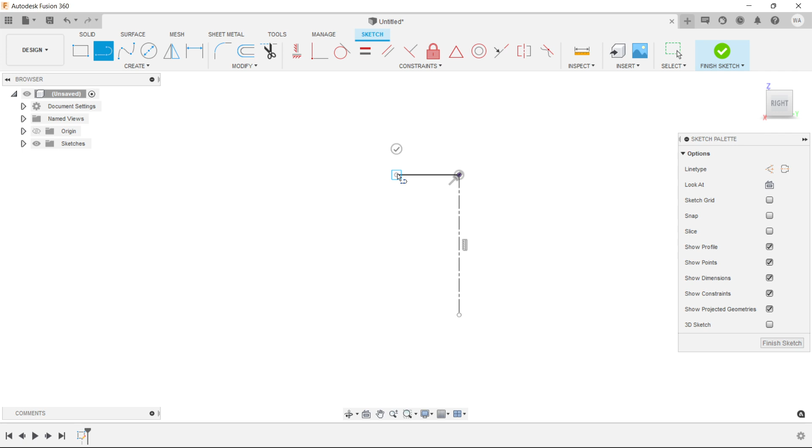Okay, so we're going to make a little part here. Again, I'm just kind of farting around. We're basically making a bolt or a screw, okay, a cap screw. Now, I guess the head is that big, and this is about that big.

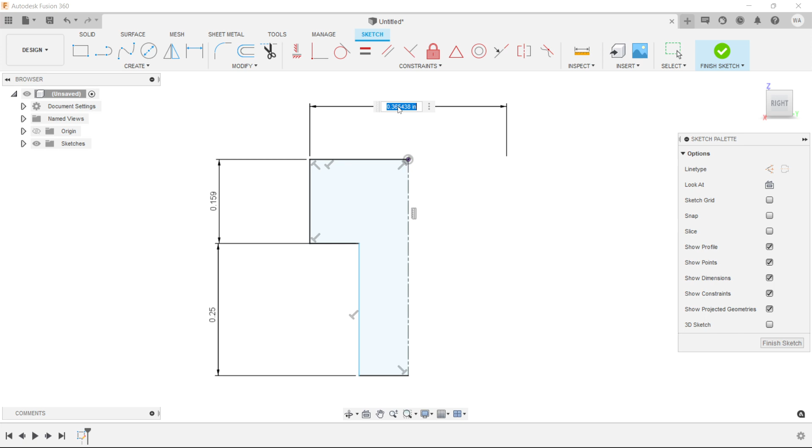Okay, so once you have these done, then we'll go ahead and we'll put in the diameter of these guys, which is 0.266, or 266 thousandths, I believe is how you say that. I am not an engineer. I am not a machinist.

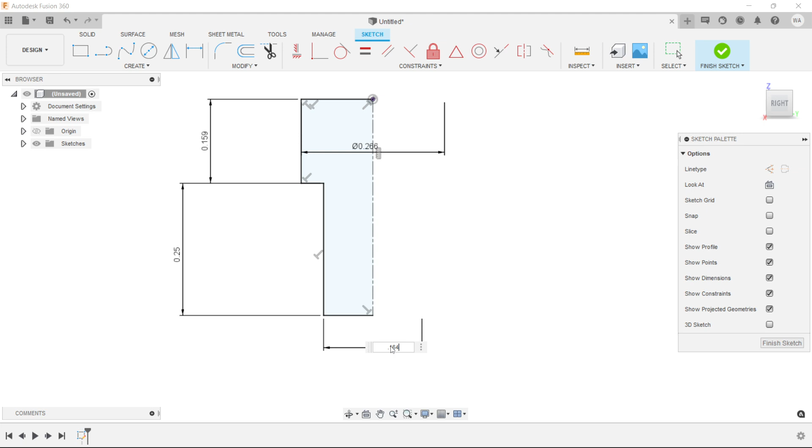So everything I do on here is completely self-taught. I'm just going through the motions, trying to figure out how to do it. From what I can tell, the threads here are, again I don't know how you say this, 8/32. I'm not sure if that's right, or just 8/32s. Not sure, but it's 164 thou, I believe is the nominal, might be the actual - no, I believe it's actually the outer dimension.

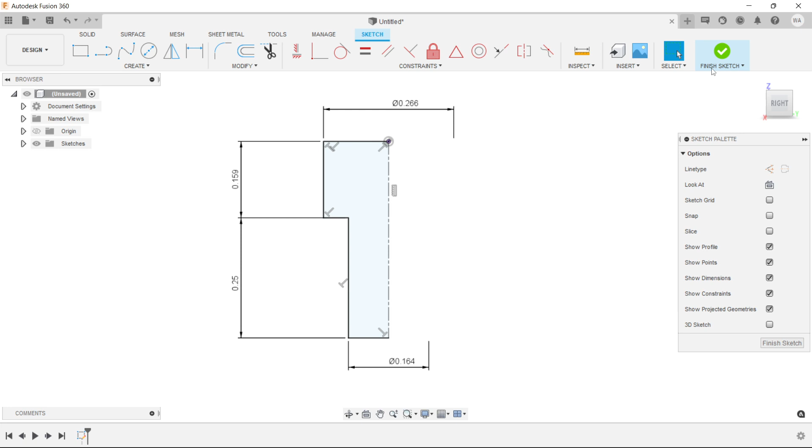So once we have that, essentially we are done with this portion here. Okay, you can make this so pretty if you want, if you're anal retentive like I am. So you have this. Because we've done it with a center line, all you have to do is just hit this revolve button, and bam, you have a screw.

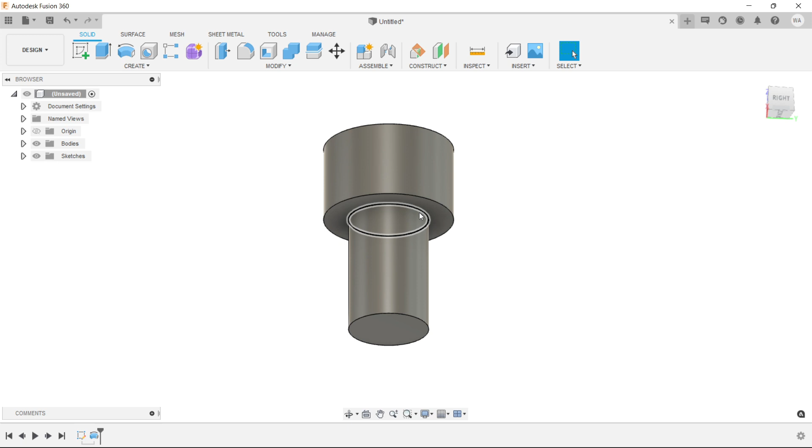Okay, there is no chamfer on the end, and there is no radii that I could see. It looked like it was just all good. However, there is a chamfer on the very top. Exactly how far it is, kind of iffy.

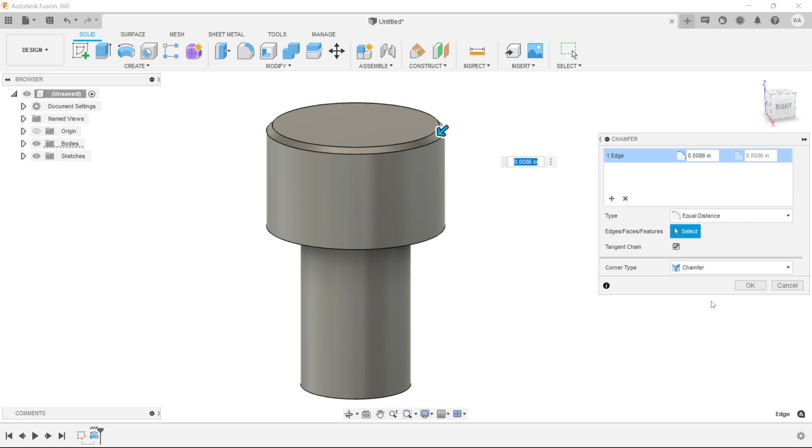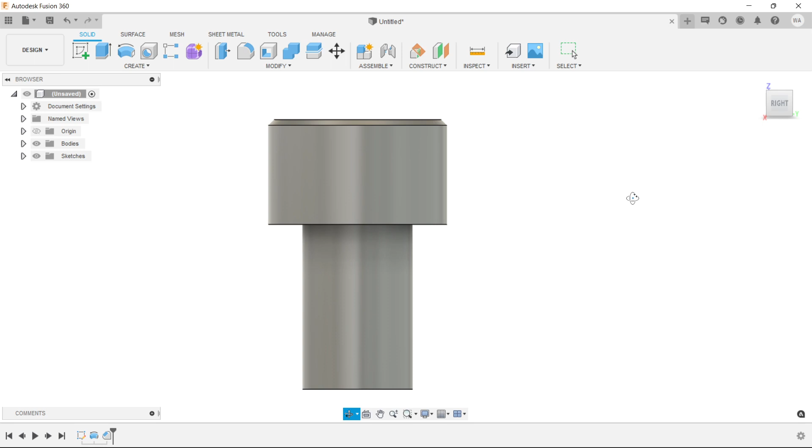Now, once this is done, you can go into create to put in the threads. Obviously, this is the portion we're threading, not the cap. These threads are kind of a silly thing, but here you have your 8-32 UNC. I believe that is like Unified Coarse or something like that. Again, if anybody knows, correct me if I'm wrong, because this is all new to me.

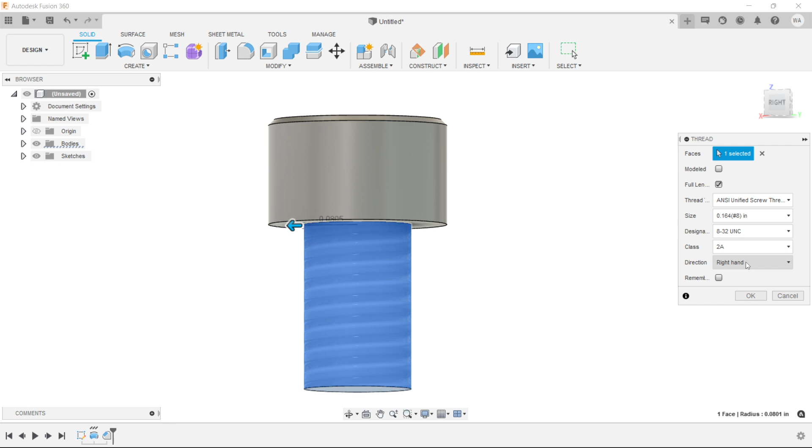For whatever reason, Fusion 360 always defaults to the wrong class, so it is 2A. It is right-handed. I want to see what they look like. And then there's also this, all right? There's full length here, so not all of them - it may not go all the way to the very top.

Okay, from what I can tell, none of them had a distance from here down, all right? Like, most of them went all the way to the very, very top. A couple of them were down in this kind of area here. But they basically have a clearance of 62 thou, if anyone's interested. Okay, I'm just going to leave it as full length. Okay, so there we have that.

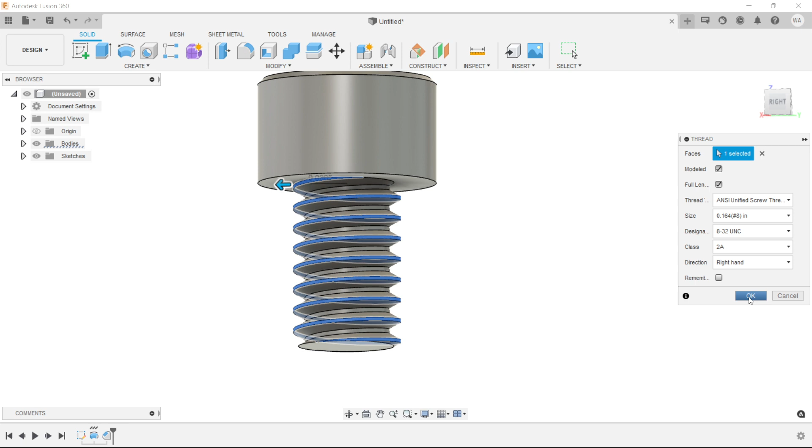All right, and now we get to draw this bad boy in the top here. Okay.

Now, another funny thing about 360 that is just it's an interesting program - I like it because it's cheap, I like it because it does do a lot of really cool things, but there's a lot of things I do not like about it. I do not have any experience with SolidWorks, so one of these days maybe I'll have it.

Okay, so we have circumscribed and inscribed. So as we're going into here, it looks like this is, yeah, this is what I want. It is the outside of the lines here, all right, which is 125 thou, or...

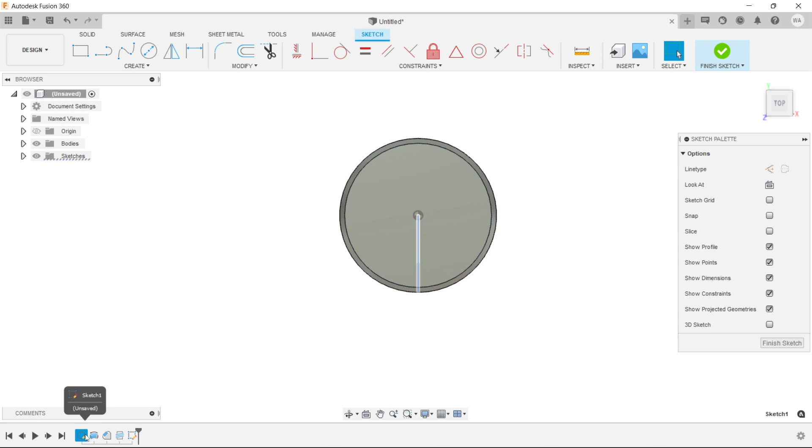Nope, see, that's not right. This is why you mess with this program, because that is clearly not right. So let me see if I've done something funny here. We'll go back in. Nope, this is right. Okay, so maybe I'm just being dumb, you know what I mean, and I'm not hitting something right or whatever. But again, this is for people. Okay, so no, this is the wrong one. Yeah, you want this one.

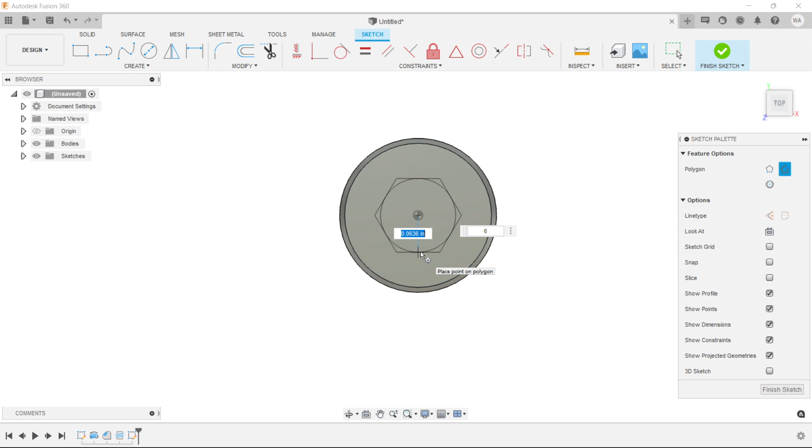0.125. See, that's just not right. It's supposed to be 0.125 from the complete other end to the other end. What if I do this divided by 2? Yeah, that's what it looks like. Yep, that's exactly what it is. Why? I don't know.

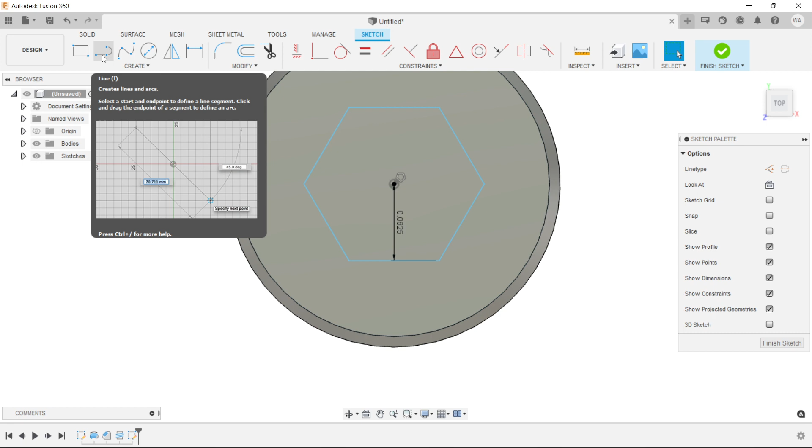Again, if someone can explain that to me, that would be absolutely wonderful, because that does not make any sense to me.

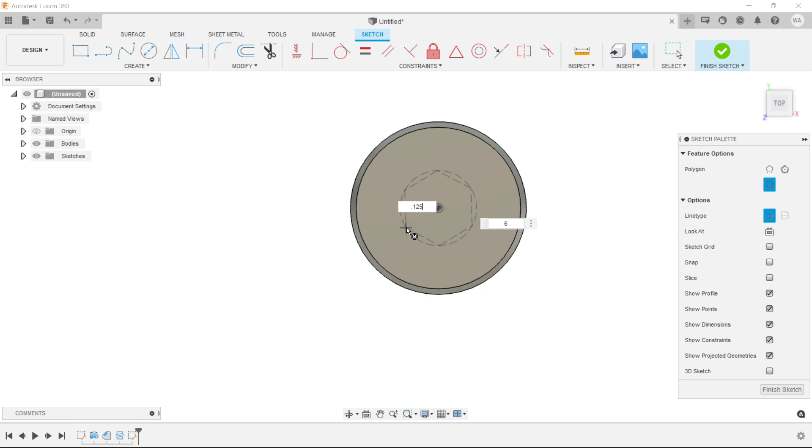Let me see, using the center point and the midpoint of one edge. But see, this is, yeah, this is not right. What if I just try it here, though? Let's try it. Again, way too big.

So if we do it, yeah, see, I don't know. Again, it doesn't make any sense to me. Like, why? There's too many things about this program that just do not make any sense to me.

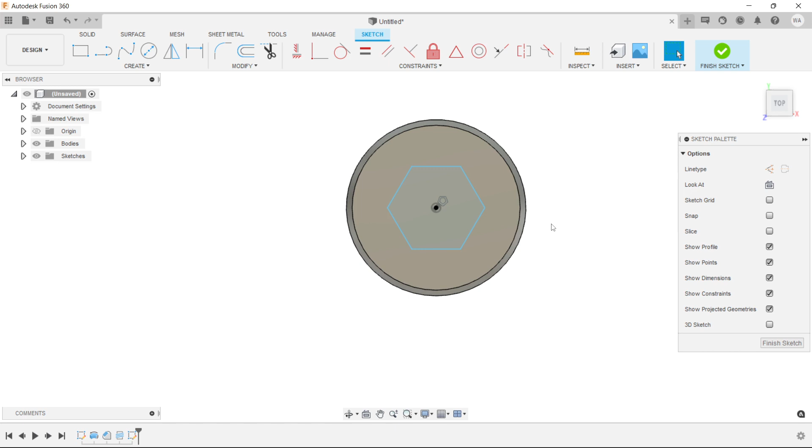Okay, so there we have it. This is our... maybe I can make it constrained if I do this. Nope. So yeah, I don't know.

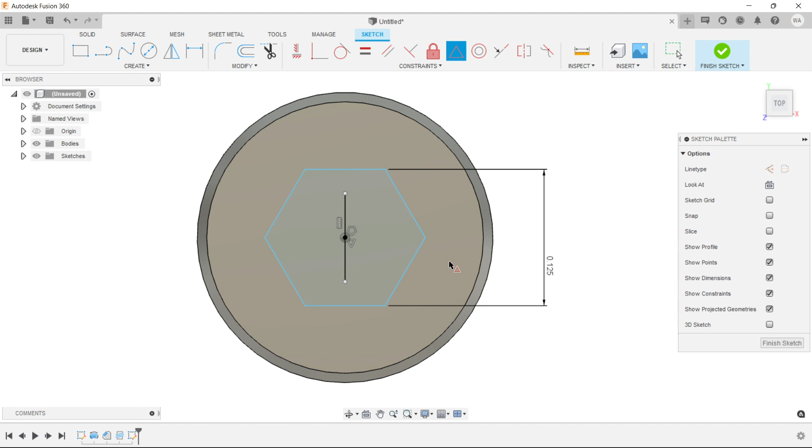Again, if anybody can explain this to me, that would be absolutely wonderful, because this is a program - it's the only one that I have, and it is extremely frustrating.

Oh, okay, it did work. Okay, there we go. So again, we'll put in our arbitrary construction line to make sure everything is constrained. Brilliant. So anyway, there we have it.

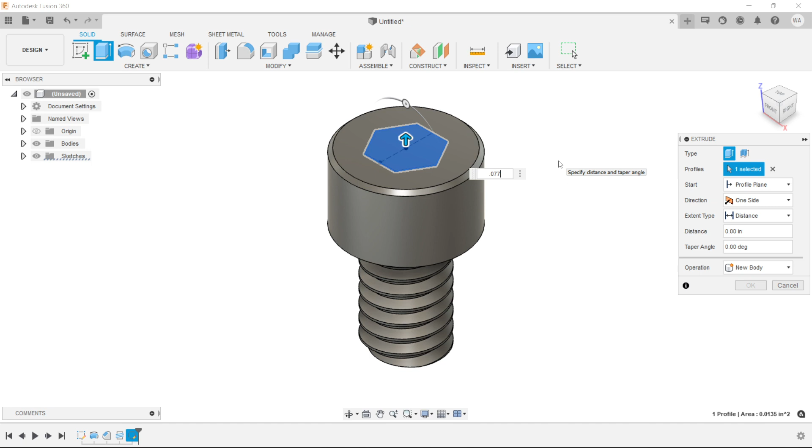Okay, now this goes to a depth of at least 77 thou. Now, how about we do this, but then we keep it - oh no, I always have to type in negative 77 thou. Instead of just being able to change directions or something, maybe someone can explain to me why I can't just put in 0.077, hit enter, and then just drag this guy down. I don't know. Maybe SolidWorks works that way as well.

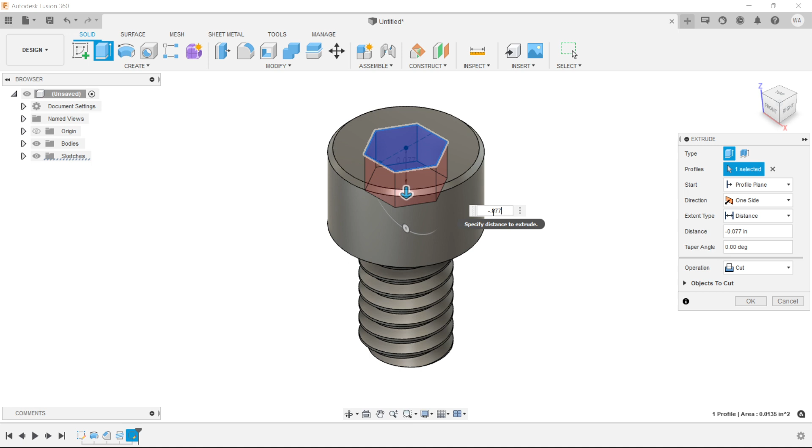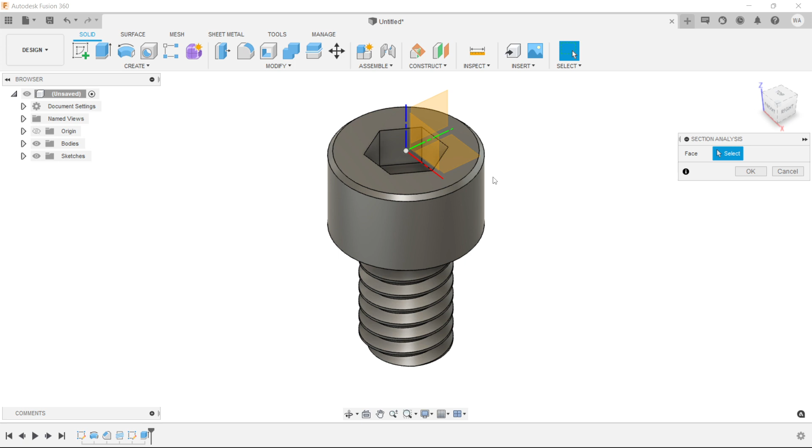I'm not really sure. But anyway, so bam. The thing I don't like about this is that it's flat in the bottom. It's not really flat on the real ones. It actually has an angled bottom to it, because clearly it's stamped into it with a big press, right?

So the real ones actually have a line that comes down like that, if you were to section it in half. Okay, but it's okay for all intents and purposes. This works just fine.

Okay, so there we have our thing. However, it is missing something. It has what is called a 52 pitch straight knurl, and it's to a depth of 0.0137.

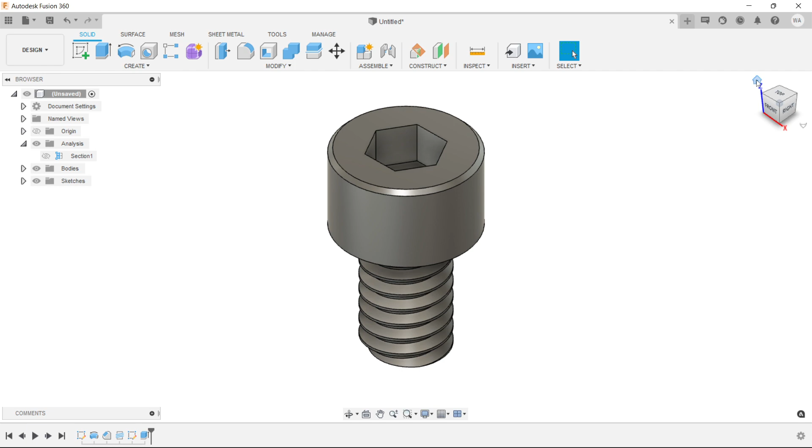No clue what that means. Okay, like I've said before, I am not an engineer, so this is something that I have tried to figure out, and I just physically cannot.

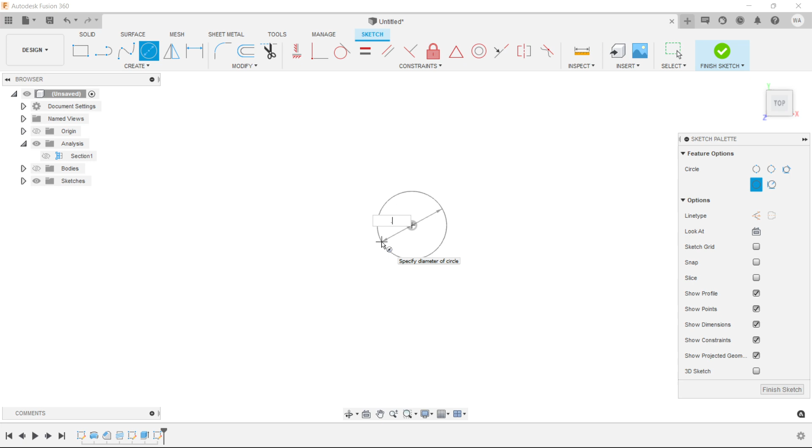Here, this is what I'm trying to do. I'm going to make a circle that is the outside diameter, and then I'm going to do this - I'm going to put the outside diameter. Interesting.

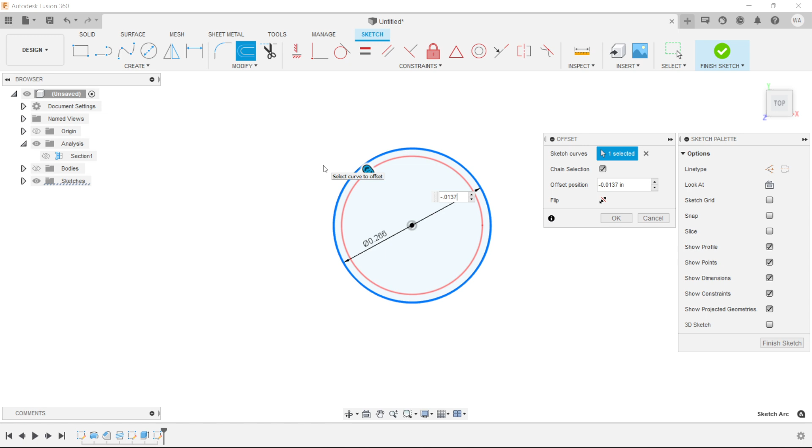Oh, hold on. I know what I'm doing wrong. Okay, so it said to a depth of negative 0.0137. Okay, bam. So that's how far the knurling goes.

Now, 52 straight knurl. Does that mean that it's actually 52? There's actually 52 of them? I don't know. Let's find out.

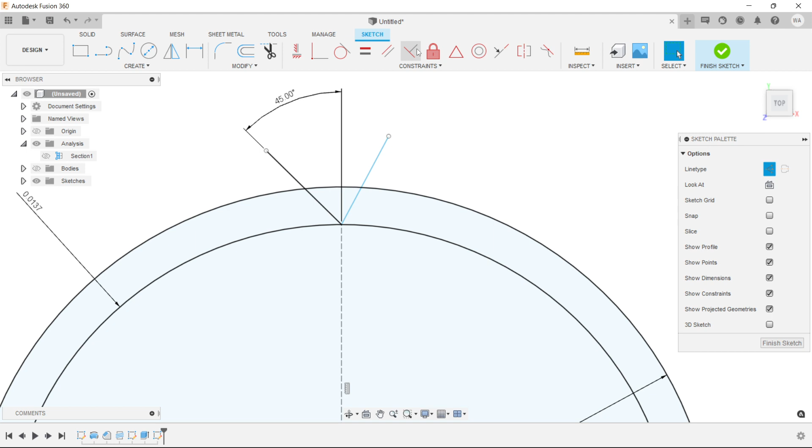Let's pretend that we are actually not engineers and this is something that we're using for the very first time, because that's what these tutorials are designed to be - for people like me who have never used something like this before. Okay, so we're just going to assume it's 45 degrees, because nothing on '52 pitch straight knurl parallel' to a depth of nothing says that it's not 45 degrees.

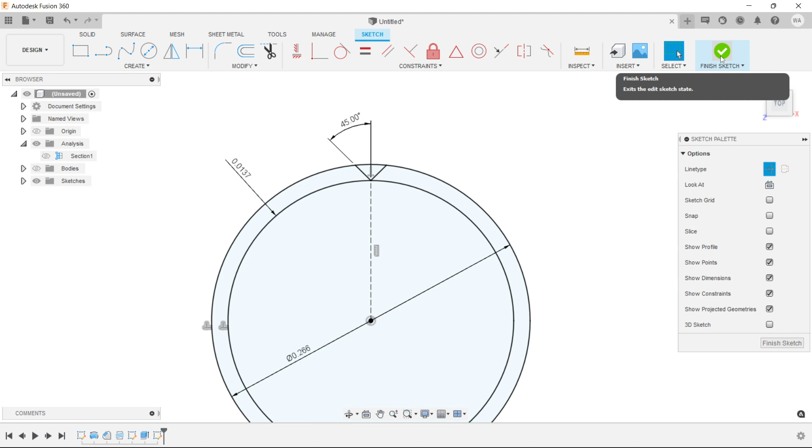Okay, so we'll turn this guy back on. We're going to cut this. Yeah, see what we're doing here? We're going to cut it to the bottom of here. All right, so cool, we've cut a little guy.

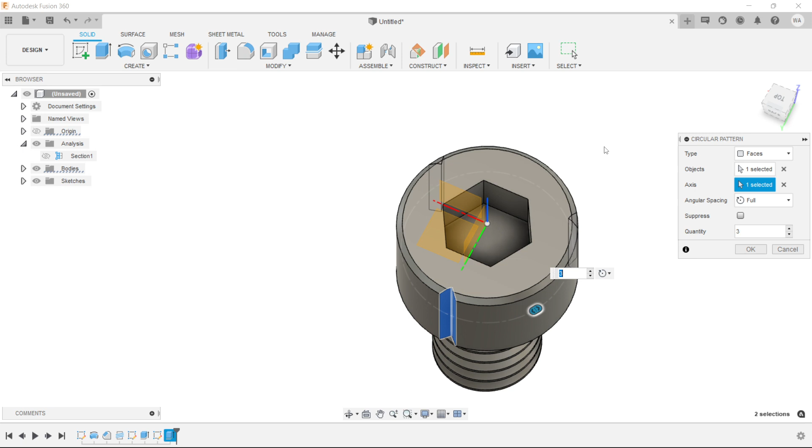Okay, and then we can do pattern, circular. You can click this guy, and then you can click the axis. Okay, now if we type in 52, it's too many.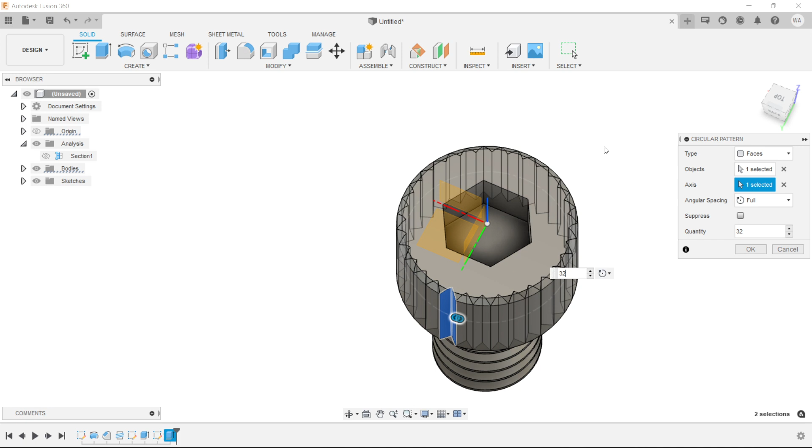So clearly it's not 52. I've looked at some of these manuals, and it's trying to explain to someone like me what exactly is going on, and I'm just not smart enough to figure this out. Okay, this is probably not right at all. But we're gonna leave it as this until someone can explain to me what it is that I'm doing wrong, like what this means.

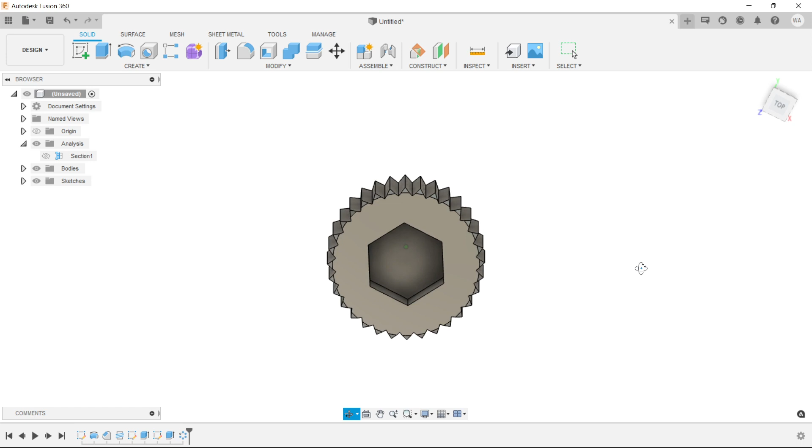32 pitch straight knurl, to a depth of 137 10,000ths. Is that how you say that? The diameter being 266 thousandths. If there's some mathematical equation that I'm supposed to be doing, that would be great, because this is all I can figure out with my, again, I am completely self-taught. I don't know what I'm doing.

So that's basically it. Again, we're going to go in and we're going to attempt to put in the material, which is supposed to be whatever AISI 4037 is. Again, if someone can explain that, what that means. Oh, it looks like it's stainless, perhaps. But there is no 40. Nope, I stand corrected, because AISI also has these numbers.

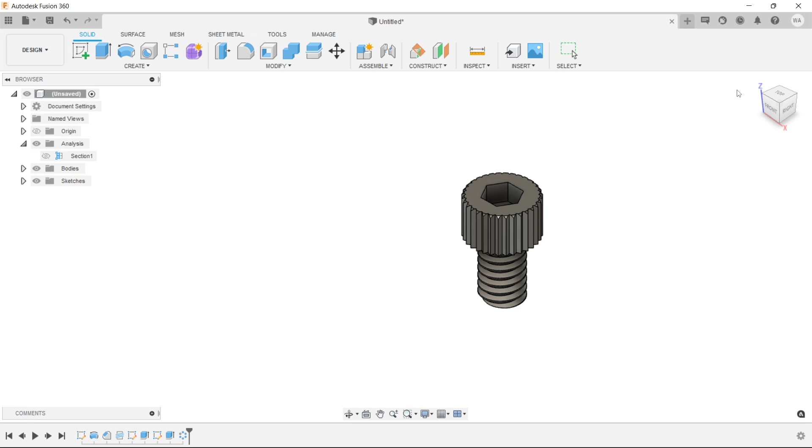So there is no number with that number on there, so that's nice. Again, I don't know if these same issues are, I know there's a billion different types of steels, so I don't know if that's just what it is. But if someone can explain to me if maybe SolidWorks doesn't have these issues, I will gladly move over to SolidWorks, even though it is literally like 10 or 100 times the price. No, 10 times the price.

But this is a hobby of mine. I do enjoy this immensely. Like I said earlier, this is something that I absolutely love doing, even though it's frustrating to me because I don't know what I'm doing. So hopefully there's someone out there that can explain to me what exactly I'm doing wrong, or just kind of nudge me in the right direction.

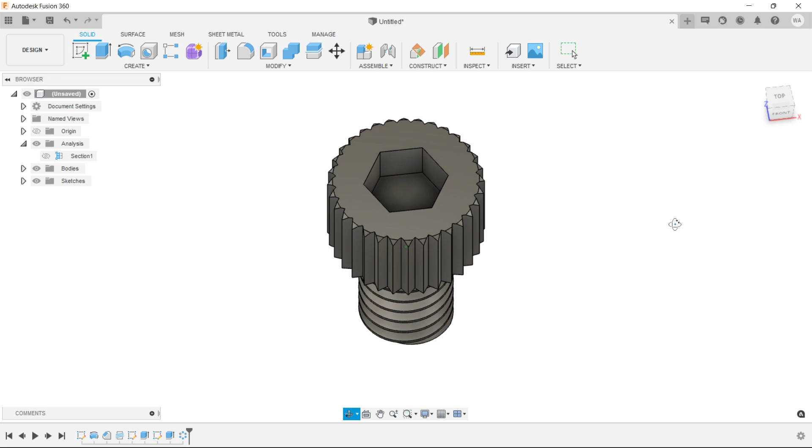Either way, I appreciate you watching another video. This is my attempt at drawing maybe what is one of these. Again, I could be wrong with this knurling thing. Man, it messes with me, and the materials are something that definitely messes me up.

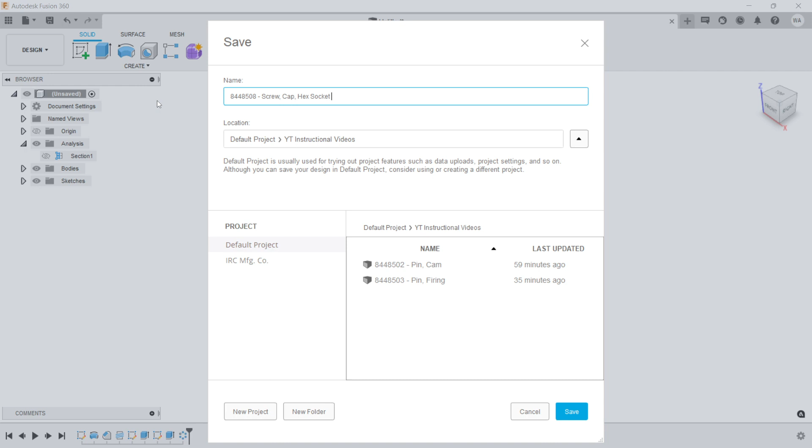But just like on the end of every video that I will be doing, we will put in the part numbers. I'm not going to do every single part, mostly because I can't. A lot of these are extremely difficult for me. I do that a lot. I have caps turned on, and they're just not something that I want to show everyone that I'm doing incorrectly. So I'm just going to go through the ones that to me are easy ones.

For someone who is just getting into this, can kind of follow along and make the part, whatever it is. But it's not something like we're making, say the bolt carrier or the bolt, which are interesting to say the least. Especially there's some interesting little cuts on there that essentially what you're drawing is the cut you're making on the part, and they can be very challenging. So I'm just gonna kind of go through parts that I think are kind of incrementally more difficult and add more challenging features.